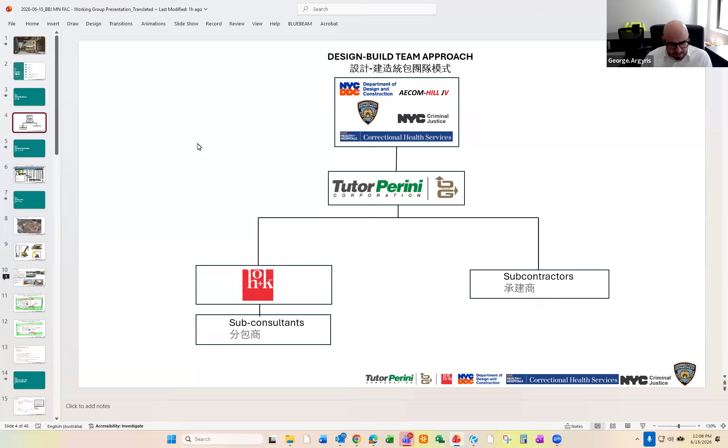Just a real quick introduction: George Argyris with Tutor Perini and ONG, representing DDC and the sponsors. We have HOK as our design team here for the design build team, and there are various sub-consultants under them. On the other side, we have subcontractors actually doing the work on the ground.

Looking at the project schedule, this is just a preliminary projection. Right now we're in June, with secant pile drilling ongoing. We'll get into more detail in a few slides. There's excavation, demo and removal of old remnant foundations, and extraction of piles. Start of caisson installation and dewatering will begin later in the year. Big picture, we're projecting completion in 2032.

The yellow highlights 2026, which will just be drilling of secant piles and excavation. As we get into 2028, we'll start our foundation work and begin going vertical with our building structure towards the end of that year. Enclosure will start the following year in 2029, and the rest will be all interior and MEP work.

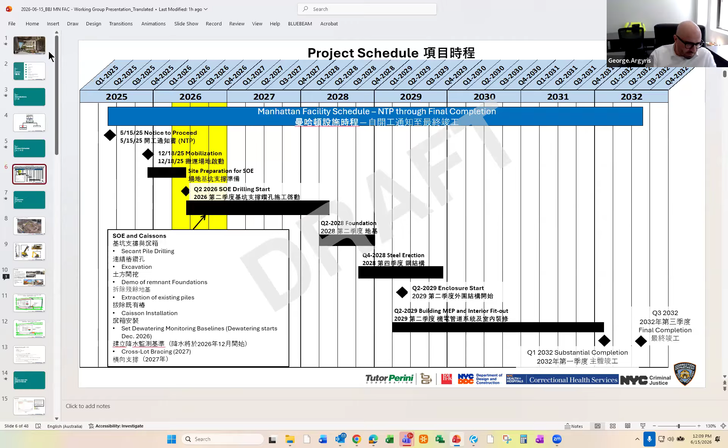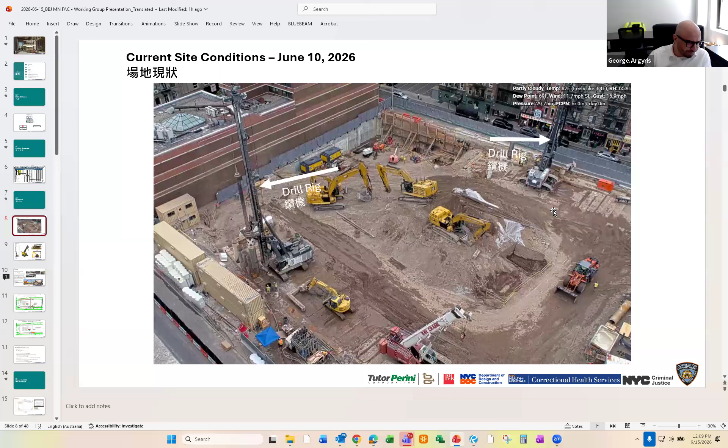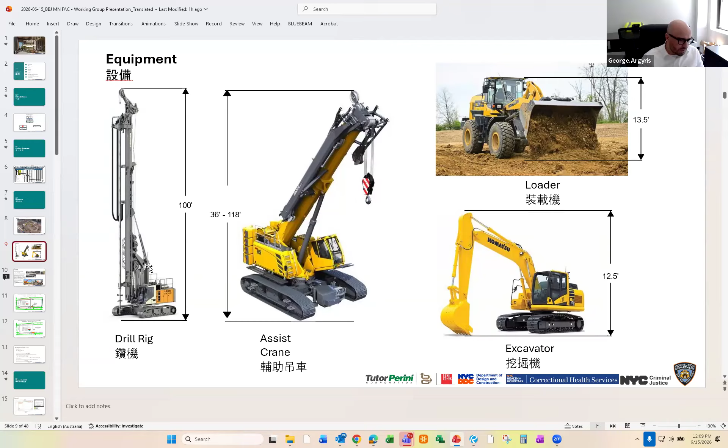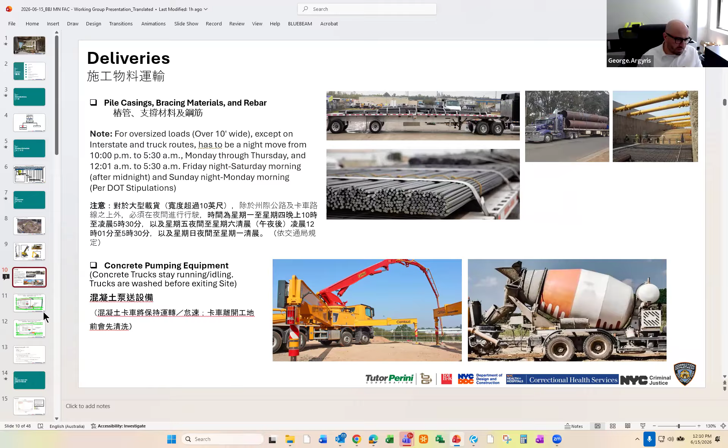In terms of deliveries, we have casings - these metal tubes or cylinders used for secant piles - reinforcement bar, and concrete being delivered to site. Mentioned earlier some of the early deliveries, which we appreciate the impact on the community - these were for oversized deliveries of equipment, such as the drill rigs. These times are really stipulated by DOT, regarding what time these overload or oversized loads can go through bridges and certain roadways. So we're really constrained by those stipulations. We'll get into more detail in a moment.

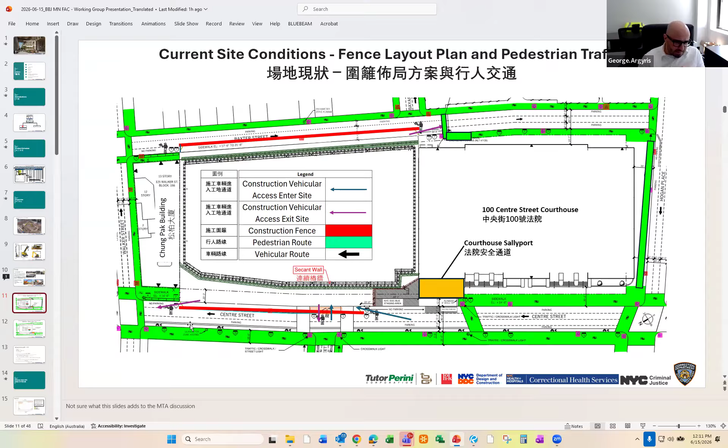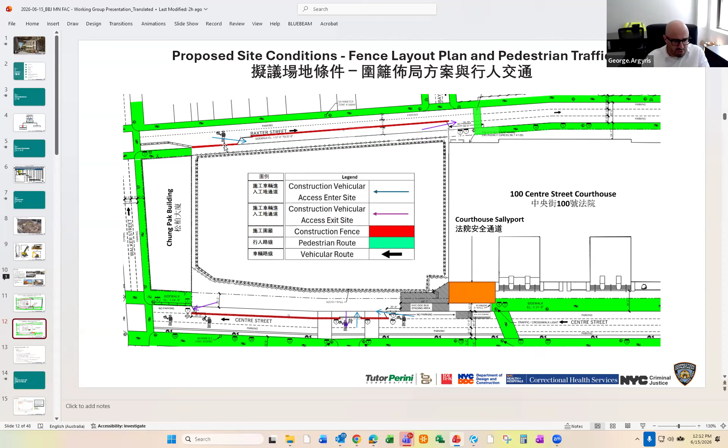More importantly, on the next slide you'll see our proposed site conditions. We will be adjusting the fencing and the gate near the northeast area of the job, next to the Chung Pak Building, to accommodate requests to move the gate further south and away from their building. You can see how the gate shifts towards the south. This will be put into place as soon as Con Ed wraps up some of their work in this area. We're still working to get confirmation from them on the timing, but it should be well within this year, at worst case late summer. We'll keep you updated as we get informed by Con Ed on completion of that work, and then adjust the site fence.

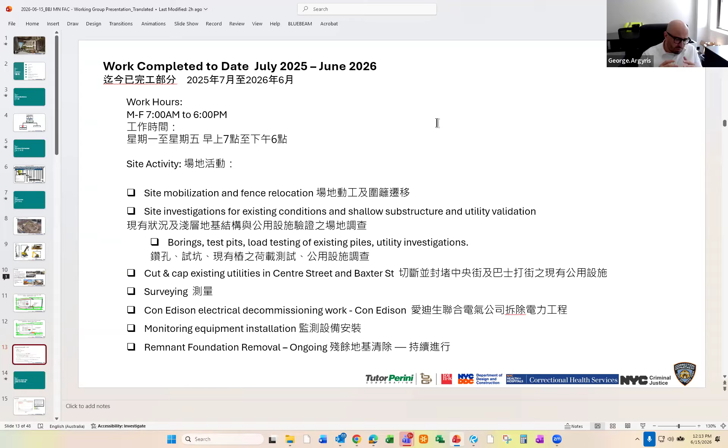Moving down here, this is what we've completed to date in the past year. As we mobilized last year, we relocated our site fence, did some exploratory work for substructures, and geotechnical testing and borings, test pits - criteria to validate our design as we continue that effort. We did cut and capping of existing utilities on both Centre and Baxter, surveying, and Con Ed has been very busy completing their work within and around our site. We've also installed monitoring equipment, which we'll get to in a moment, and removal of some of the old foundation elements from the previous building.

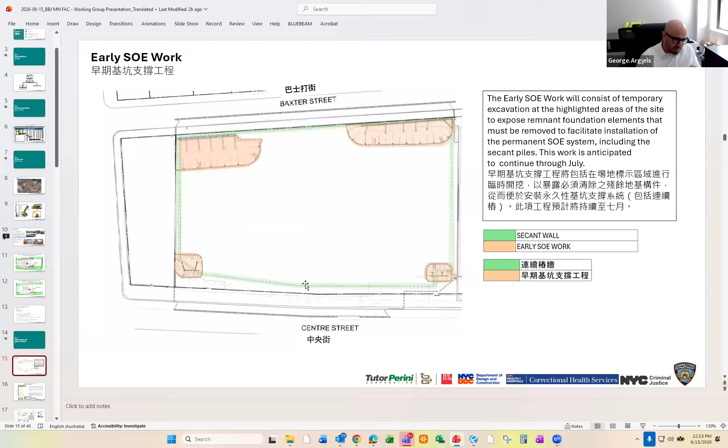For 2026, you can see here in the orange shading, this is just some of the early works that started in April to start removing some of the old foundations. The light green is the secant wall, which is what those big drill rigs are doing right now, and I'll explain to you what that consists of.

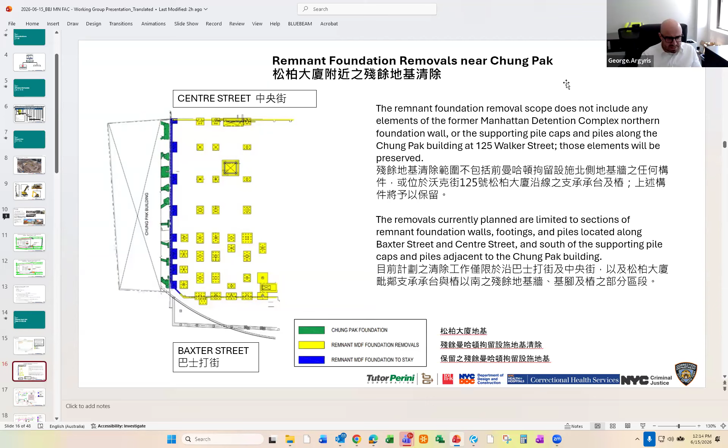An important topic that's been raised is, are we impacting the Chung Pak foundation? For clarity, in green is the Chung Pak foundation that will not be removed or modified. In blue is the section of foundation from the previous building, which we will not modify, that will stay as well. In yellow are elements that we are actually removing, elements from the previous detention building that we need to get out of the way so we can place our foundation there.

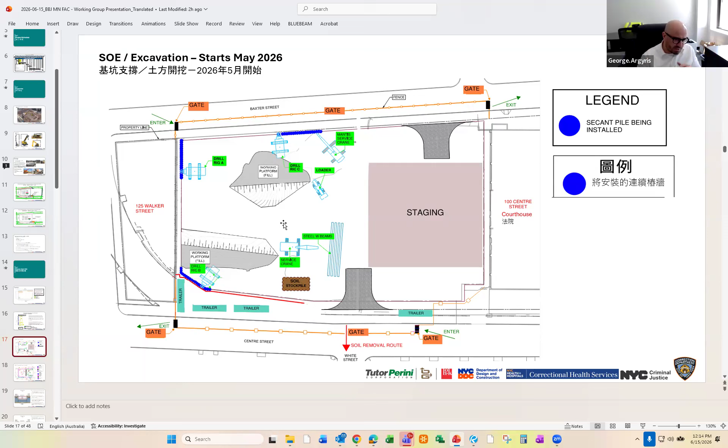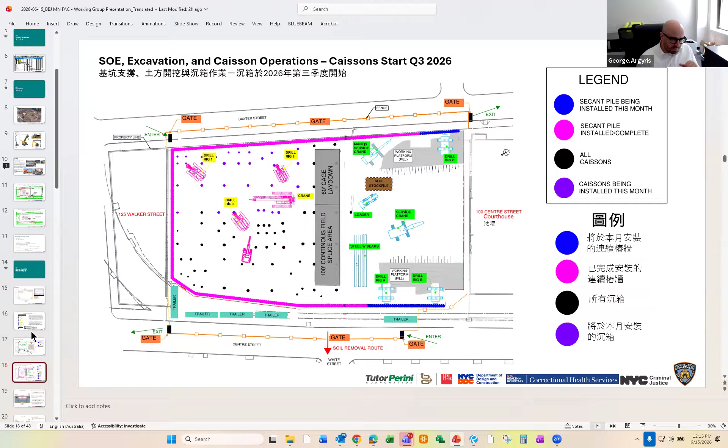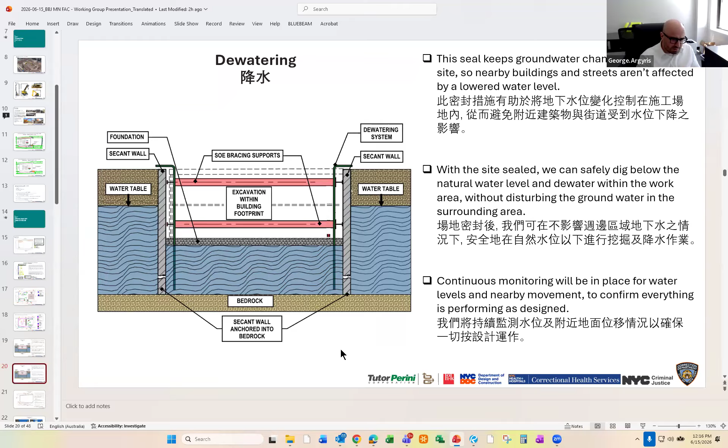Here's some more information, a little bit more into the theoretical side of the dewatering system. We'll have pumps operating continuously to dewater within the site limits. We'll be monitoring those levels continuously. We have certain parameters that we need to stay within, which we'll also get to in a minute. This is a pretty simplified version of what will be happening out there.

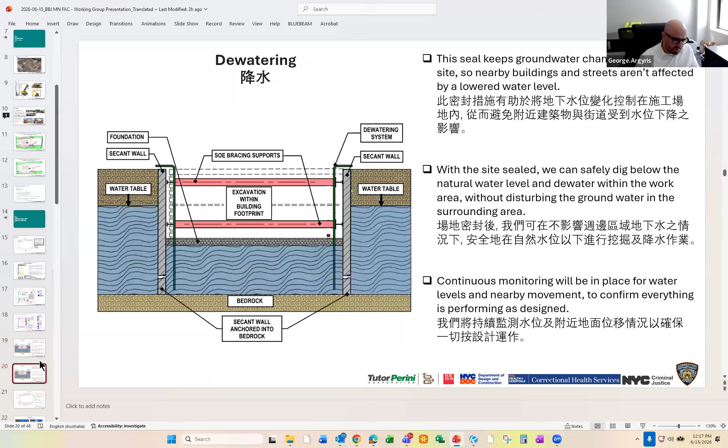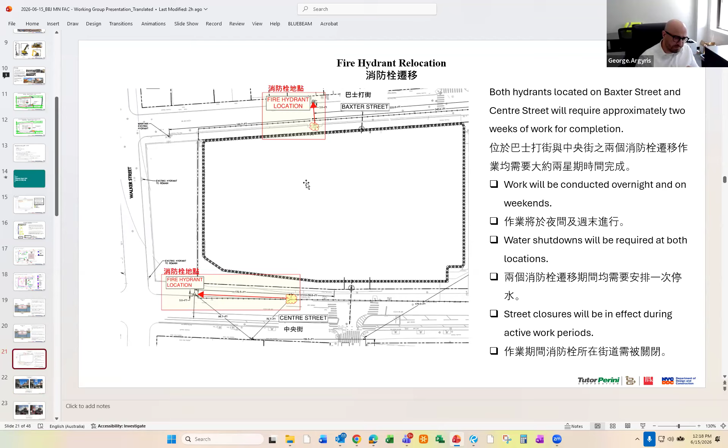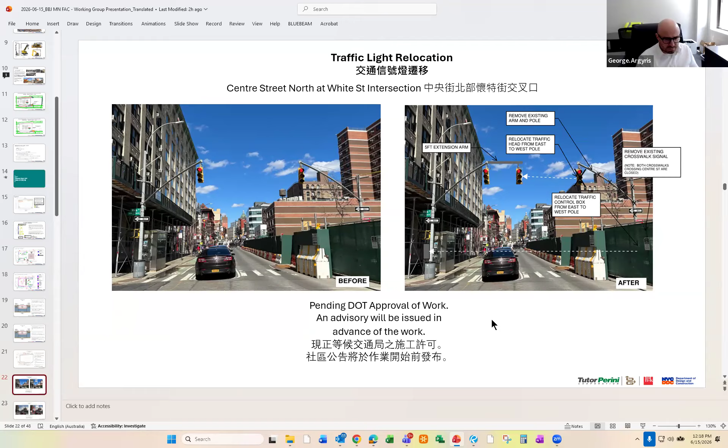Some additional work to facilitate our project is traffic light relocation along Centre Street. You can see here to the left the current configuration. We'll have to remove the actual support pole here from the right, and the traffic light will be added here to the current western post. Pretty straightforward—this plan is actually with DOT right now under review, and we should be expecting approval in the near future before we start this work.

Lastly, regarding DOT items, we will be relocating a light pole here along Centre. You can see it's within our site fence line. We'll replace it with a new light pole here on the opposite side of the street to maintain the light as required by DOT standards.

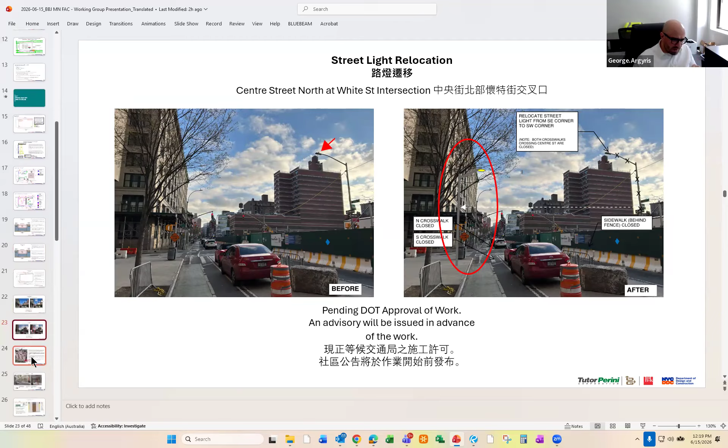Lastly, this is the courthouse to our north. In the future, the sallyport for the Manhattan facility will be wedged right between the courthouse and the new facility. To accommodate that requirement, we are going to replace this old emergency egress currently on this corner with a new location along Baxter.

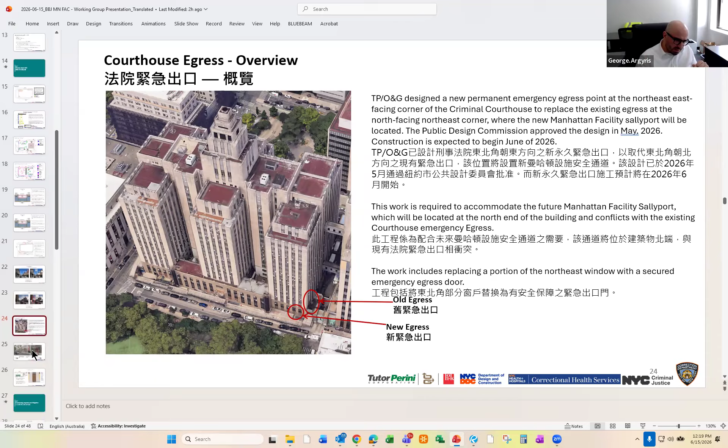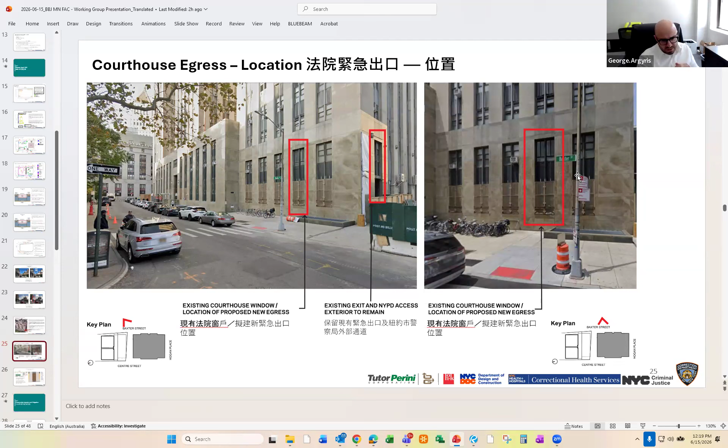To give you a better sense of that, here's a street view. This is the previous or existing location, and this will be the new location. To minimize the amount of work and disturbance here, we are going to use an existing window, where we'll replace half of it with a new door, which will look something along these lines. You can see the color scheme will really match what's in the existing building.

This has gone through the PDC already, and we have received positive feedback from them as well. Right now we're with DOB in the permitting phase for this work.

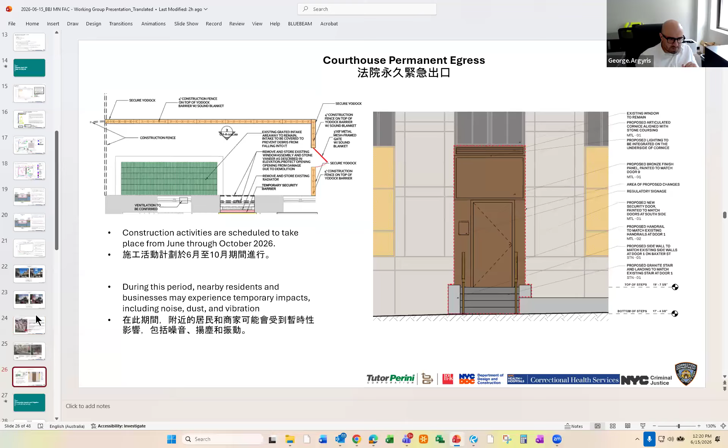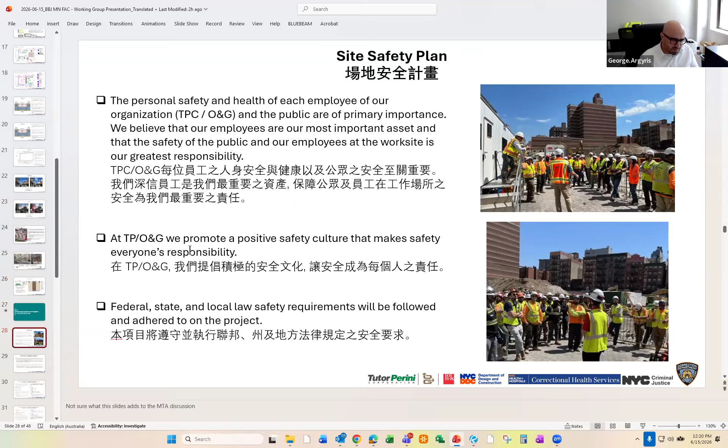Looking at some of the community impacts, site safety is of course very important to us. We're going to be implementing training for anybody who comes on site, not just the workers but any management or visitors. Everybody gets an orientation before they go onto the site, and we're going to be promoting this positive safety culture throughout.

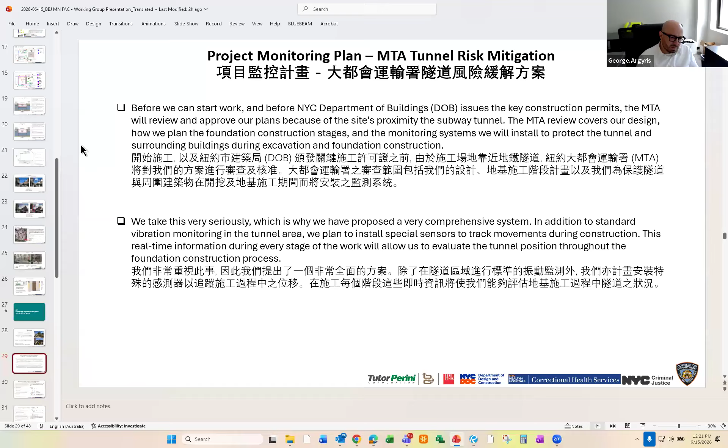Those have been in place, and it's been approved by Transit and by DOB. So that monitoring is in fact in place - that's one aspect of our monitoring.

Secondly, adjacent buildings - very important. We have vibration and movement monitoring there, just as we do in the tunnel. There's certain criteria set by the engineer of record, where we first get an alert. The initial threshold for vibration is 1/4 inch per second, which measures velocity of movement. Once we have an initial alert, we investigate that area. If we go within the limit, we'll pause work in that area, investigate, and take any mitigation measures we need to take. Same concept with movement monitoring.

We have certain criteria set. For landmark or historic buildings, the limit is a little tighter, just because of the structural sensitivity there. We have a 0.5 inch limit for non-landmark buildings.

Noise monitoring, of course, follows NYC Administrative Code. For daytime work hours it's 85 decibels, and for after hours it's 75. Same practice here - if we go within the limits, we'll investigate that area of work. If it continues, we'll pause the work and look at any mitigation measures we can take.

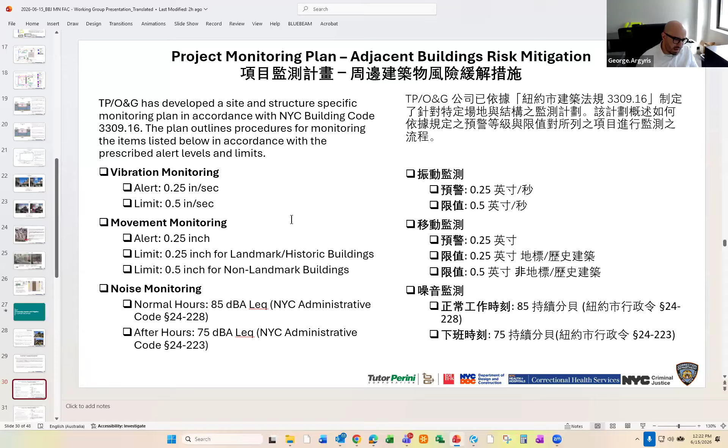Similarly, we have dust monitoring, with certain criteria. We're looking at PM10, which monitors the level of granularity of particles in the air. There's two thresholds: alert and limit. We'll investigate what's going on if we get near the alert or if we receive any complaints. If we get within or above the limit, we'll certainly look at pausing the work in that area and reworking or mitigating it.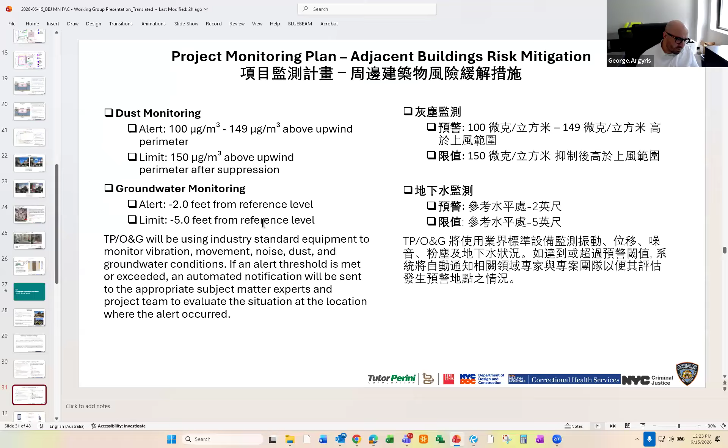Lastly, we have groundwater monitoring. This goes along with our dewatering operations, which will start next year. These are alerts and limits that have been established with MTA standards and our engineer of record. So just as we're monitoring all the other areas, we'll be monitoring groundwater levels as well.

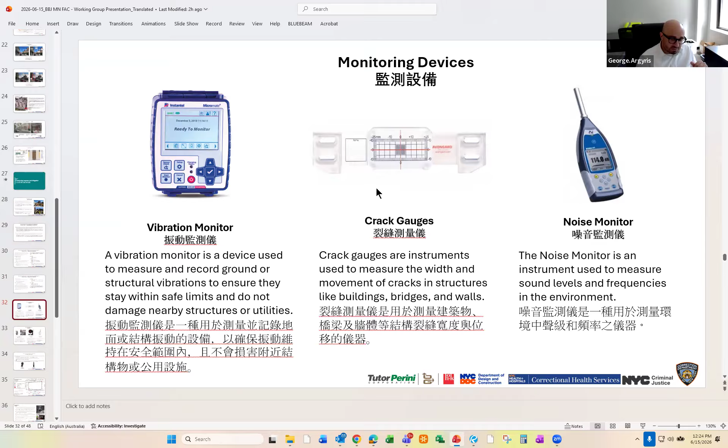These are just some samples of the devices: vibration monitoring and crack gauges, which are installed throughout the surrounding buildings. They measure if there are already cracks in place and the type of movement, if any. Noise monitors are pretty straightforward. The automated total stations, or AMTSs, communicate continuously with optical prisms and monitor movement.

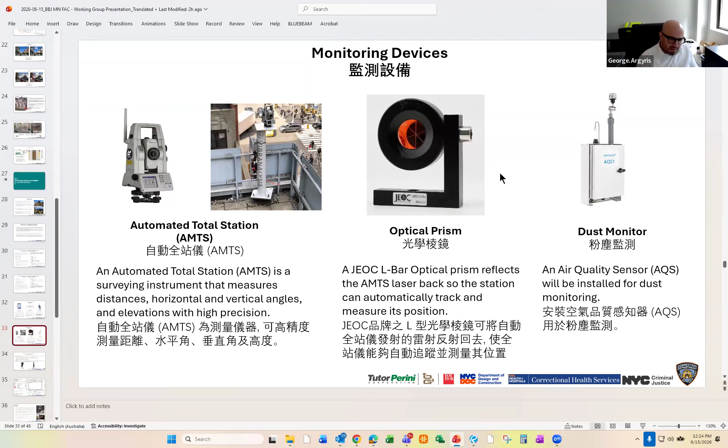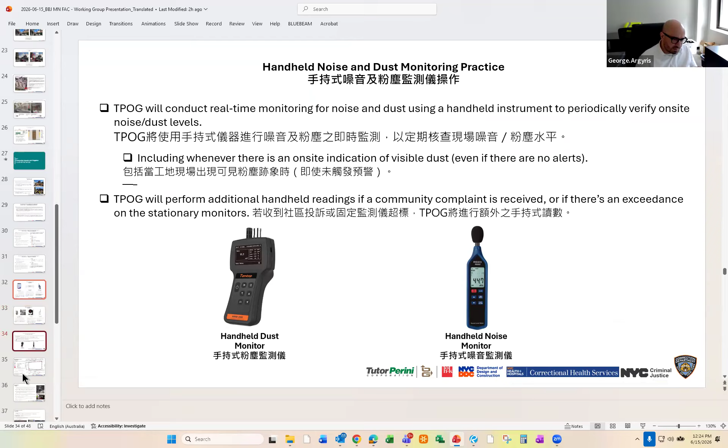Those are located throughout the buildings surrounding our site, and we also have dust monitors. Along with that, we have handheld devices that measure dust and noise. We're doing measurements throughout the day to make sure we're not going over the regulated limits.

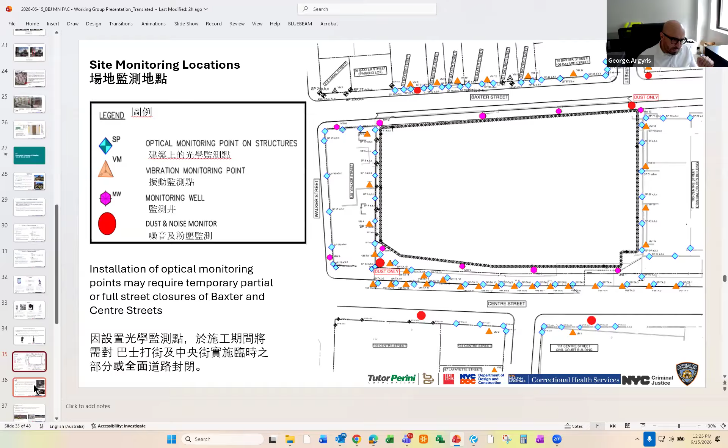Moving on to the next.

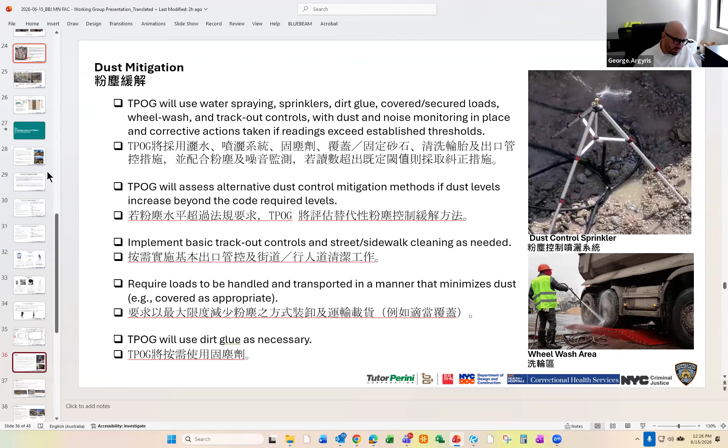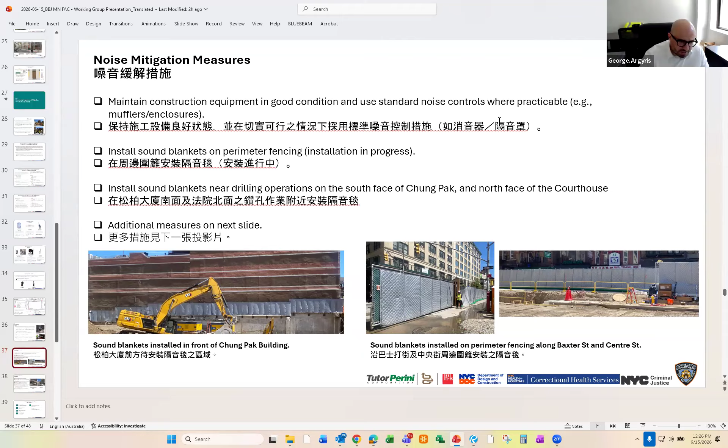Noise mitigation measures. As we mentioned, we have sound blankets that are along our site fences. We have already installed along Chung Pak some sound blankets as well. This is to minimize any noise attenuating from the equipment that's drilling adjacent to it. We also use barriers with sound blankets that are next to certain drilling equipment. So we're trying to do as much as feasibly possible here.

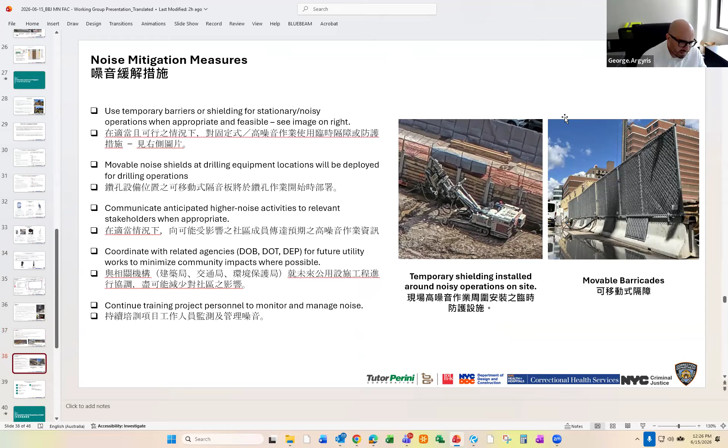Here's a good example of the additional barriers with the sound blankets that are put next to the pieces of equipment, kind of like a secondary level of protection there.

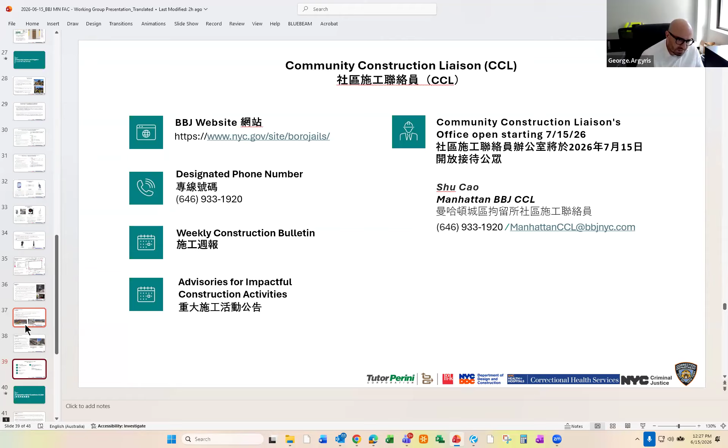Of course, any concerns, any complaints, or if you see any dust or noise, you can call the CCL office, and they'll certainly elevate that to us, and we'll investigate and try to mitigate it as soon as possible.

Some frequently asked questions.

Reporting. To date, we have started preparing reports from February onwards. We wanted to start ahead of our construction work to troubleshoot and make sure our systems are in line. For February and March, we noticed some gaps in some of the data, and that was due to some of the batteries going out. So we have remedied those issues, adding bigger battery packs and some redundant power to those pieces of equipment. So from April, May, and onwards, we were able to mitigate those issues, and that will continue on a monthly basis.

Dust monitors - there are 6 static locations where we're monitoring dust and noise as well, but we also have the hand monitors, as we mentioned earlier. So we have our staff out there taking measurements throughout the day to make sure that we're within our limits.

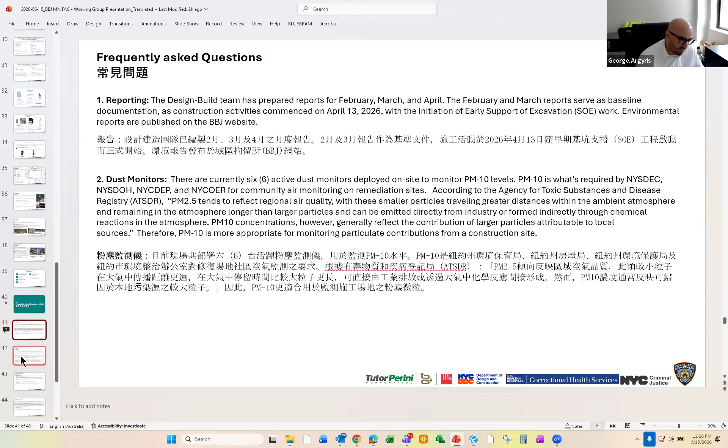Dust exceedances - this question pertains to dust going above the level. Really, if there's any issue with dust, we will try to do some additional spraying. And if there's any downwind dust, we'll certainly look at pausing work if the issue becomes continuous.

Noise exceedances - we are measuring 85 dBA at 20-minute LEQ. Those notifications get sent to a set of construction managers and project managers where we make the decision. If we go over, we pause the work, investigate, and look at what we can do to mitigate that.

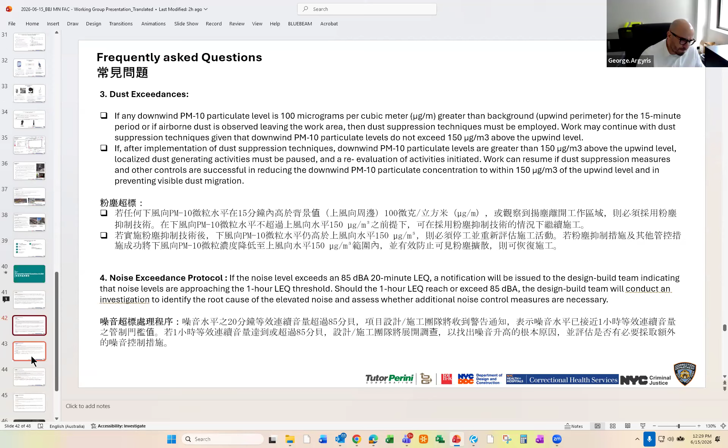Adjacent building monitoring, of course we have north and south. We have the Chung Pak building to the south, we have the courthouse. They have vibration monitors, tilt monitors, optical monitors, all to measure any type of influence that might happen from our construction. And of course, there are other properties within 90 feet or so that have this monitoring in place as well, both the vibration and the opticals.

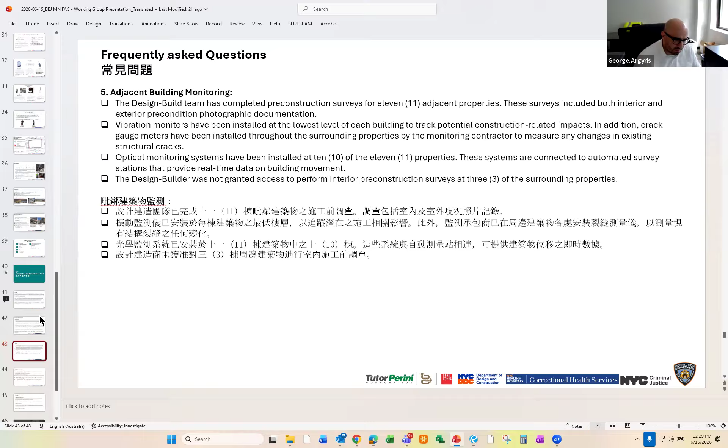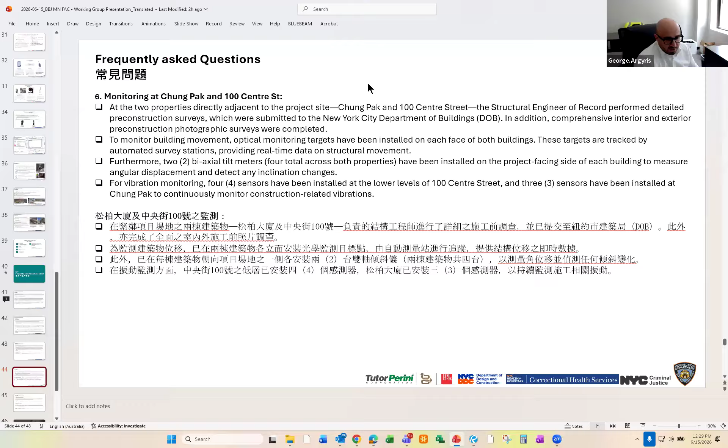Another question is about monitoring at Chung Pak, which I just touched on. We do have these sensors in there, and we are looking at this information constantly on our dashboards.

Frequently asked questions about unexpected subsurface conditions. To date, we have not found any archaeological or VOCs as we're excavating. We have found some unexpected subsurface conditions relating to old foundations, but not related to archaeological or environmental concerns.

Regarding dewatering contamination, our initial investigations on the site did not come up with any type of environmental concerns, which is what we submitted to DEP for a dewatering plan. Based on that review, the DEP recommended or required that we use settling tanks. These settling tanks allow some of the solids that might come up as we're pulling water out, and any oils, to separate, so the water being discharged is without any of those elements.

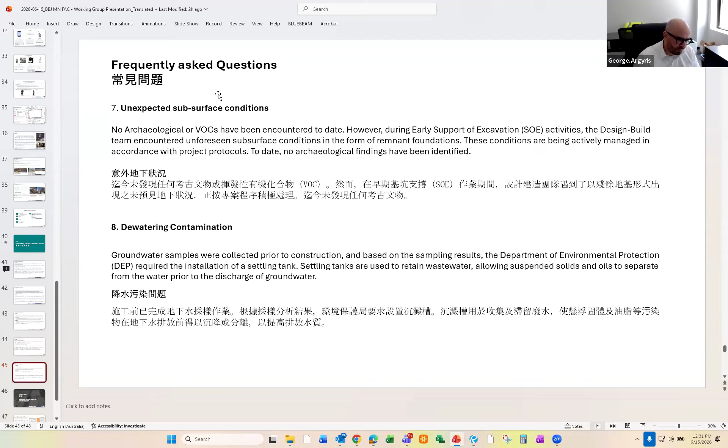So we'll open up to any questions.

Great, thanks. If folks could use the hand raising feature - some people have put a few questions in the chat. I'm going to ask if people can just ask those for the benefit of everyone. So Jan, did you want to jump in here?

There's been a recent history of 3 stop work orders in Brooklyn. We have a history of the Yodock fences falling down, both from Gramercy and also at the Brooklyn site from this contractor. That's a failure to simply follow directions of the manufacturer and also city code, that these things should be filled with water.

For those who don't know, a motorcyclist was almost killed because the Tutor Perini fences fell on top of him during the most recent windstorm. If the city is going to allow 3 incidents of fences falling down, which are obviously critical oversights, what is the threshold by the city that finally says we have to really look harder at this? And what are the citations, and have those citations been recorded?

One of the violations for the stop work order is that Tutor Perini is not even self-reporting. We also saw that with Gramercy. So my question is, after looking at this very intense and very dangerous thing they're about to embark upon in our neighborhood, if they're not filling containers with water to keep them from falling over, and a man was almost killed, how are we to trust the agencies, DDC, the contractor, the monitors?

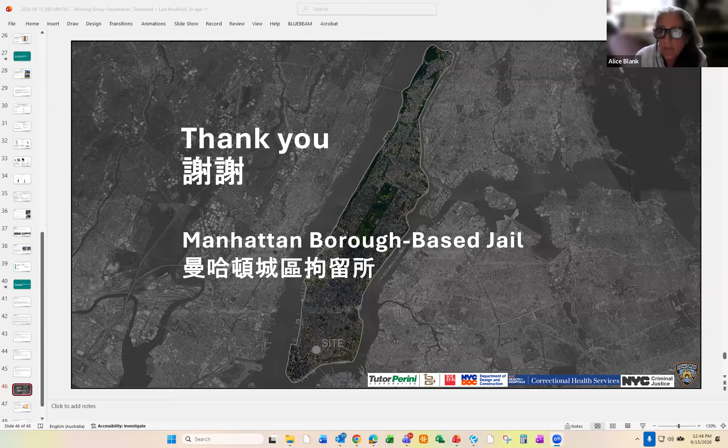It seems odd, given that the state has recognized it on its list of resources for historic preservation, and that the city itself has committed to, at some point we don't know when, review it for landmarking. So I think it's odd that it's not reconsidered a bit, given the significance of the building. Additionally, would it be possible for you to let the community board know when there are reviews, such as the PDC for the courthouse egress? I was unaware that was occurring. If that's something that appears on your website perhaps, but if you could just notify the board, if you haven't already, on those kinds of issues, that would be helpful. That's it, thanks very much.